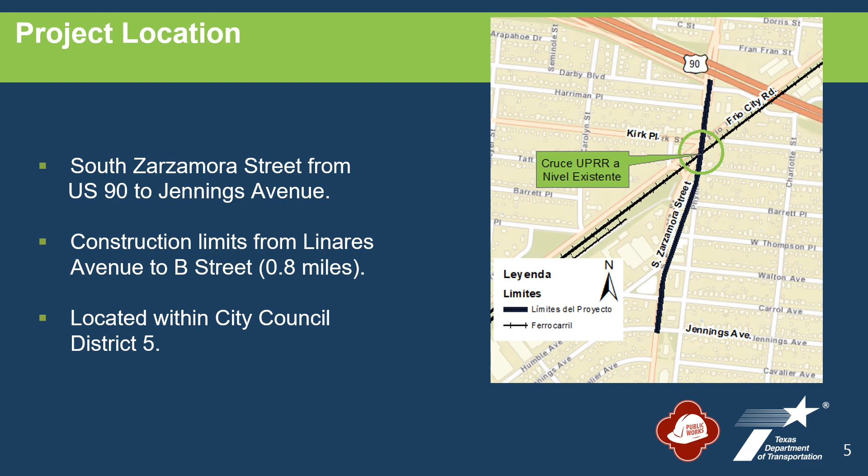The project is located within City Council District 5, and the city is working alongside Councilwoman Castillo on this vital project. This is a depiction of the existing typical section of South Zarzamora Street within the project limits. South Zarzamora Street consists of two 11-foot travel lanes in each direction with 6-foot sidewalks on both sides of the roadway. In addition, there is a 12-foot center-left turn lane with intermittent medians throughout the project limits.

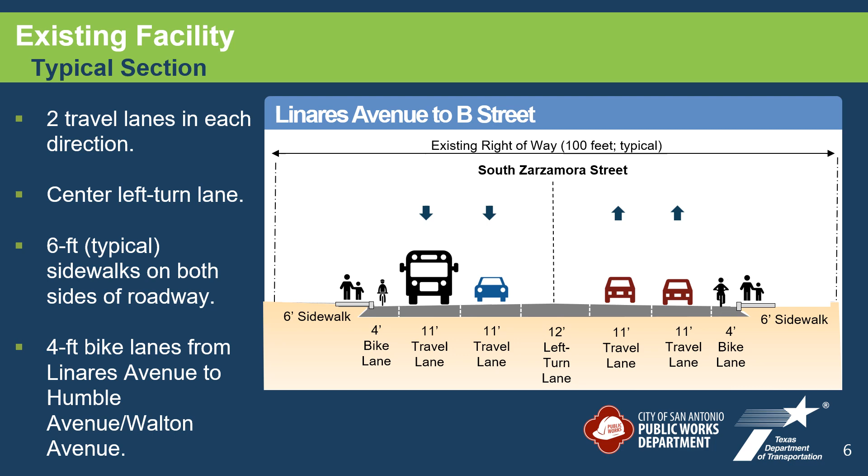From Linares Avenue to Humble Avenue, Walton Avenue, there are also 4-foot bike lanes on both sides of the roadway. The existing right-of-way width in this section is typically 100 feet. Here's a picture of the existing South Zarzamora Street intersection at Frio City Road. Zarzamora Street is a primary north to south arterial roadway that connects to US 90 on the north and Southwest Military Drive and I-35 on the south.

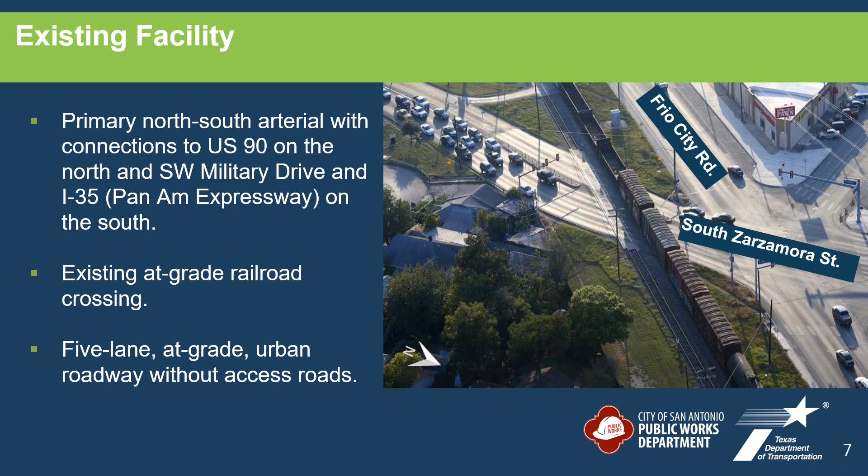Just south of Frio City Road are at-grade railroad tracks crossing South Zarzamora Street. In this section, Zarzamora Street is a 5-lane, at-grade urban roadway without access roads. The existing signalized intersection at South Zarzamora Street and Frio City Road forms a 5-legged intersection with Kirk Place. A railroad crosses Zarzamora Street just south of the intersection.

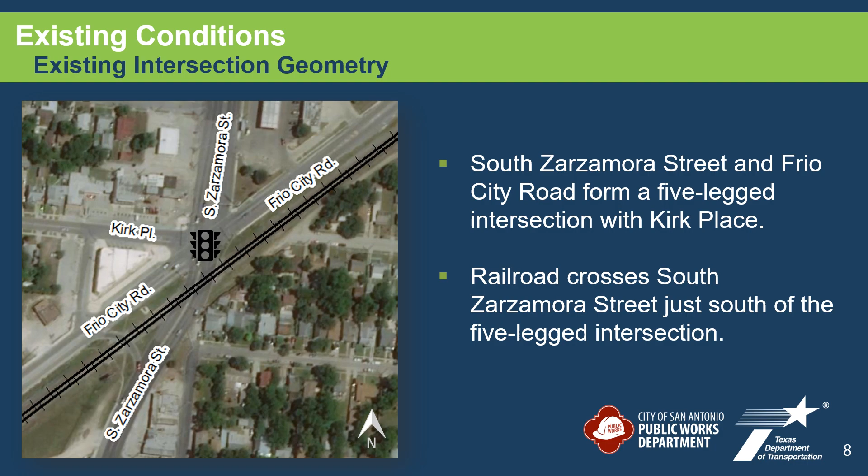South Zarzamora Street and Frio City Road intersect at an acute 35-degree angle, making the intersection complex for turning movements and signalized operation. According to the American Association of State Highway and Transportation Officials, multi-leg intersections should be avoided wherever practical. Multi-leg intersections are those with 5 or more intersection legs, such as the South Zarzamora Street, Frio City Road, Kirk Place intersection. These types of intersections are often inefficient and awkward for the traveling public.

Also, they create more conflict points than a standard 4-way intersection. Conflict points are locations in or on the approaches to an intersection where vehicles' paths merge, diverge, or cross. The complexity of an intersection increases with an increasing number of approach legs to the intersection. The number of potential conflicts for all users increases substantially at intersections with more than 4 legs.

Lastly, multi-leg intersections often create safety issues for pedestrians and bicyclists. These intersections increase crossing distances, pose navigation difficulties for pedestrians with visual impairments, and reduce the visibility of pedestrians and bicyclists to motorists.

According to the U.S. Department of Transportation, approximately 35 trains travel each day on the double set of tracks at the South Zarzamora Street Railroad crossing, averaging almost 1.5 trains per hour. One of Union Pacific's busiest rail yards is located approximately 1.6 miles south of the Zarzamora Street Railroad crossing.

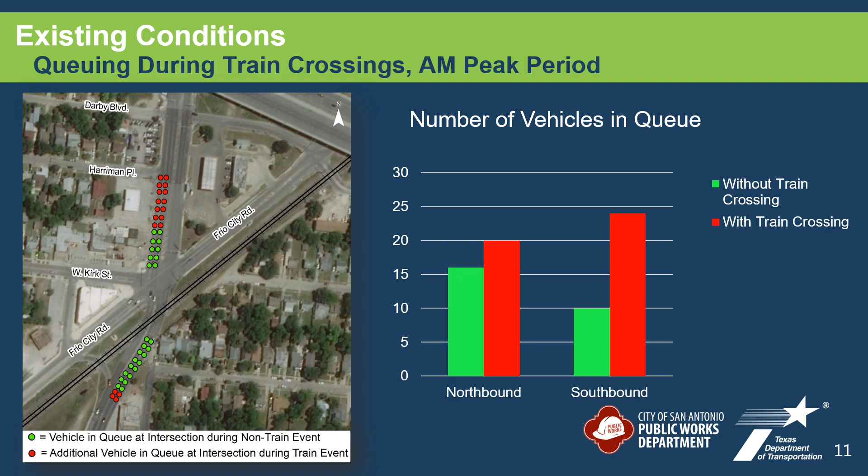Now, this may not seem so bad, but let's see what happens in the evening peak period. In the PM peak period, conditions worsen even further. Without a train crossing, there are approximately 24 vehicles that stack up in the northbound direction and 20 vehicles in the southbound direction. This number increases to about 80 northbound vehicles and 70 southbound vehicles during a train crossing. This equates to over a 100% increase in the number of vehicles that stack up at the intersection.

As you can see, the stacking length in the PM peak period is substantial, with the northbound approach backing up past West Thompson Place and the southbound approach backing up to Fran Street north of US 90.

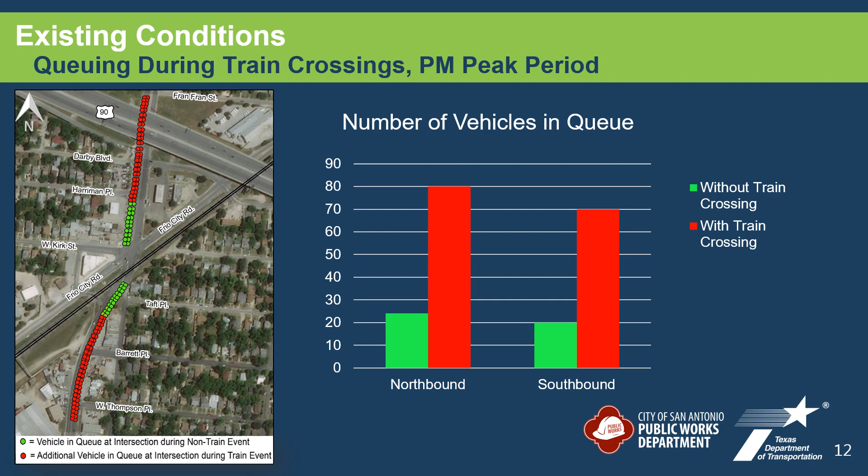The City of San Antonio also conducted a crash analysis to determine the existing safety conditions of the project area. This analysis revealed that the crash rate on South Zarzamora Street was approximately 3 to 5 times higher than the statewide average crash rate for a similar urban 4-lane roadway. This analysis was conducted using crash data for a 6-year period from 2013 to 2018.

The crash analysis also analyzed crash severity and the manner of the crashes in the corridor. During this time frame, one crash resulted in 2 fatalities, while approximately 27% of the crashes involved some form of injury. The majority of the crashes were rear-end collisions, while approximately 18% were angle crashes, which tend to be more severe. Since 2014, there have been 8 crashes along the project limits that involved pedestrians or bicyclists.

The proposed project is funded in part by federal funds administered through the Federal Highway Administration, a federal agency, and is therefore subject to the National Environmental Policy Act of 1969, also called NEPA. The proposed project was developed in accordance with the rules and regulations established by NEPA, Federal Highway Administration regulations implementing NEPA, and TxDOT's environmental and public involvement rules.

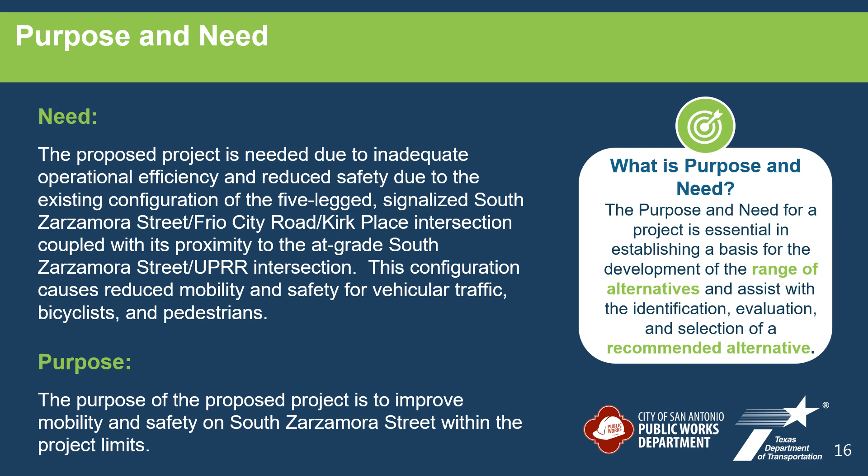A purpose and need for a project is essential in establishing a basis for the development of the range of alternatives and assist with the identification, evaluation, and selection of a recommended alternative. The proposed project is needed due to inadequate operational efficiency and reduced safety due to the existing configuration of the 5-legged signalized South Zarzamora Street, Frio City Road, Kirk Place intersection, coupled with its proximity to the at-grade South Zarzamora Street Union Pacific Railroad (UPRR) intersection. This configuration causes reduced mobility and safety for vehicular traffic, bicyclists, and pedestrians. The purpose of the proposed project is to improve mobility and safety on South Zarzamora Street within the project limits.

The South Zarzamora Street project has been a topic of discussion for many years, and there have been numerous public engagement activities held. The city has heard and considered feedback received, including comments on both sides of the issue. On the one hand, many community members have stated that this intersection is a concern, while on the other hand, some community members have expressed their desire to keep it the same. Current traffic and freight projections indicate that the problems currently experienced in the project area are only going to get worse in the future. The city now has funds available to provide a solution to the problem before it gets worse. The city and TxDOT are working together to provide a solution that improves mobility and safety on South Zarzamora Street.

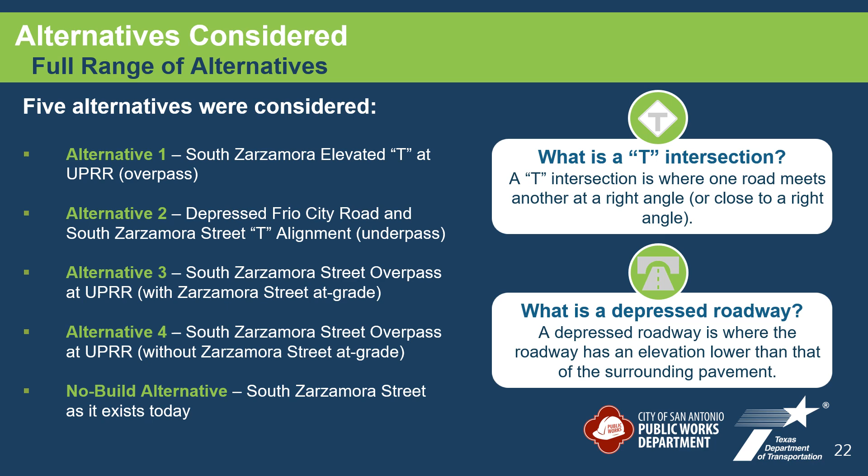Alternative 1 included the construction of an alternate route with 2 elevated through lanes from South Zarzamora Street to Frio City Road. This would include constructing 2 at-grade access roads on South Zarzamora Street for those wanting to continue north on the existing South Zarzamora Street. This alternative would have required the reconstruction of Frio City Road to raise Frio City Road to connect with the alternate route. Under this alternative, there would be no change to the existing at-grade railroad crossing on South Zarzamora Street.

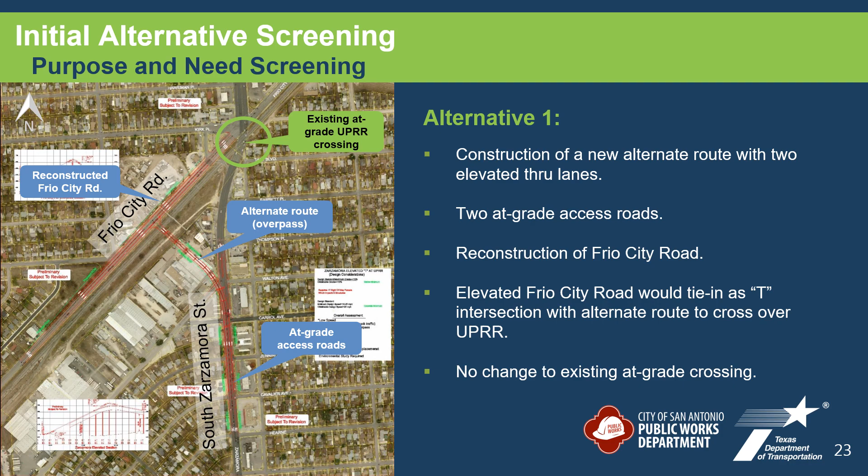Alternative 2 was very similar to Alternative 1, except the alternate route would be depressed as an underpass rather than being elevated. In addition, this alternative would have required the construction of a new railroad bridge structure. Similar to Alternative 1, Alternative 2 would require reconstruction of Frio City Road to connect to the alternate route, and it would not change the existing at-grade crossing on South Zarzamora Street.

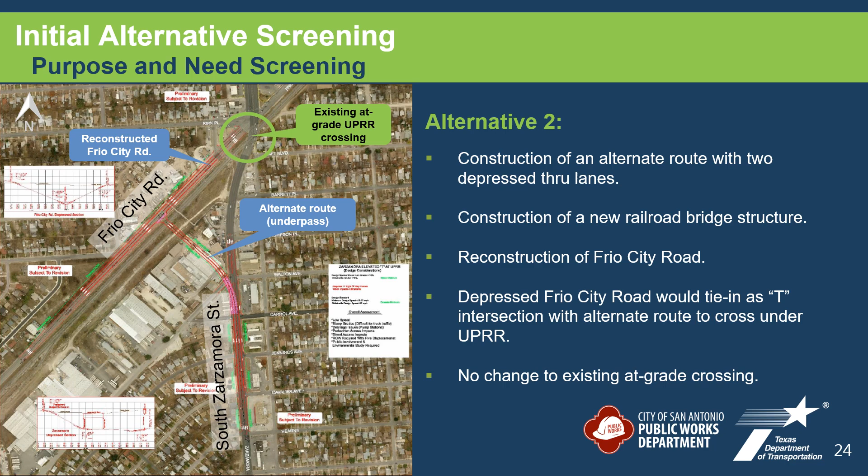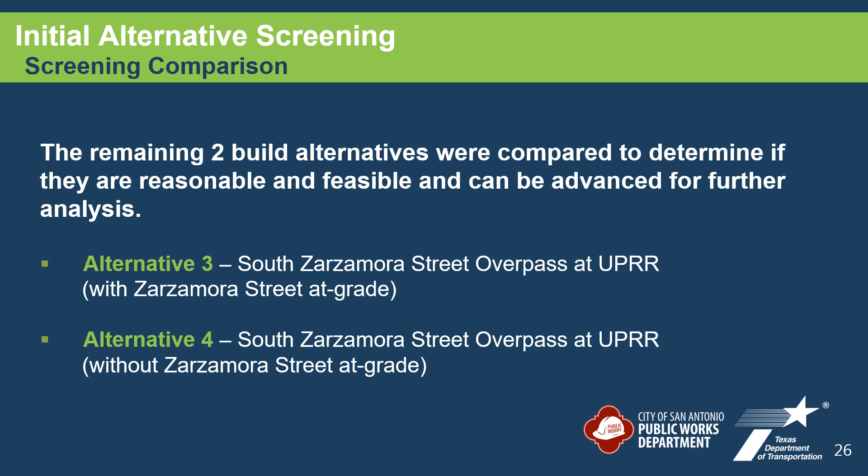Both Alternative 1 and Alternative 2 were eliminated from further analysis because they did not meet the project's purpose and need. More specifically, these 2 preliminary alternatives did not fulfill the purpose of improving safety as they did not reduce the at-grade conflicts with the railroad. The remaining 2 build alternatives, Alternatives 3 and 4, were compared in a screening matrix to determine if they were reasonable and feasible and could be advanced for further analysis.

Alternative 3 would include constructing 2 overpasses, one for northbound traffic and one for southbound traffic, each with 2 through lanes to cross the existing railroad crossing. In addition, 2 at-grade access roads, one in each direction, would be constructed to maintain access and connectivity to the local street network. To accommodate the proposed overpass and comply with current railroad roadway intersection requirements, this alternative would require the realignment of South Zarzamora Street south of the railroad crossing.

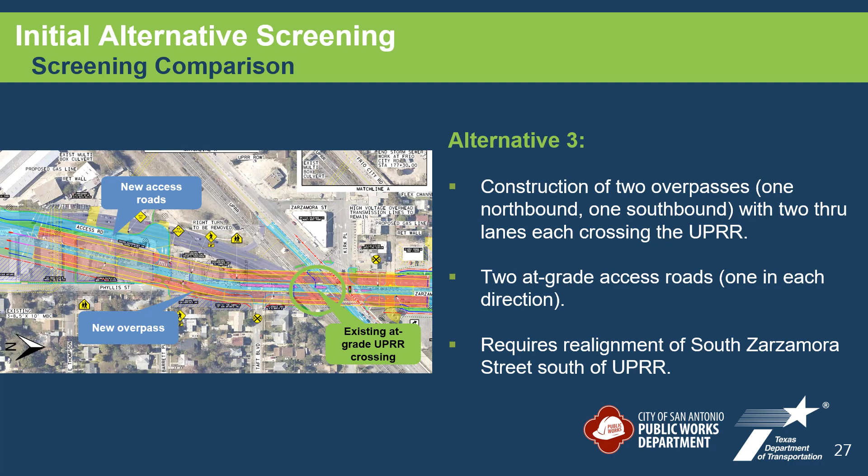Alternative 4 is similar to Alternative 3, but does not include constructing access roads on South Zarzamora Street. This alternative would also require the realignment of South Zarzamora Street south of the railroad crossing.

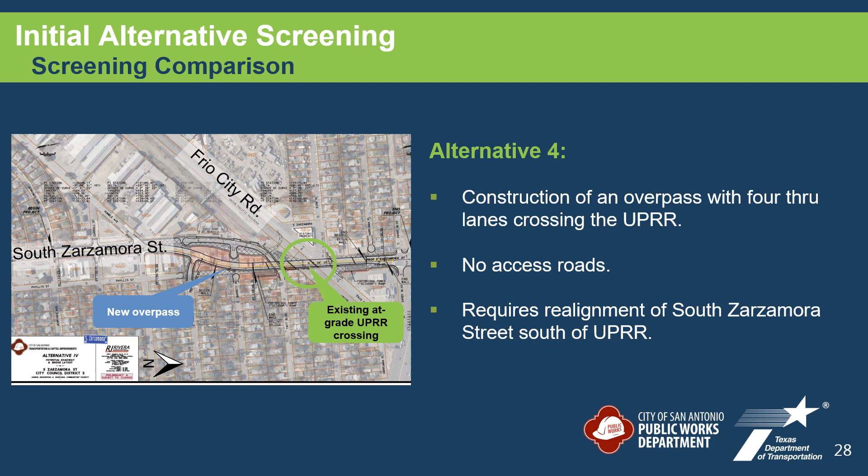Comparing these two alternatives, Alternative 4, the alternative without access roads, would result in decreased accessibility and connectivity to local surface streets since at-grade access roads would not be provided. This would substantially alter circulation within the adjacent neighborhoods, and properties along Barrett Place, Taft Boulevard, and Harriman Place would lose direct access to Zarzamora Street.

On the other hand, the proposed access roads in Alternative 3 would maintain accessibility and connectivity to the local street network and adjacent neighborhood. Alternative 3 would also retain local access via Phyllis Street, thus maintaining the normal, though modified, accessibility to neighborhood streets. Under Alternative 4, however, local access via Phyllis Street would be lost as a connector for local streets. This loss would require additional signage for accessing the neighborhood streets.

For bicyclists and pedestrians, Alternative 3 would include accommodations for these modes on both the proposed overpass and at grade. However, under Alternative 4, there would be no bicyclist or pedestrian accommodations such as sidewalks provided at grade, and all bicyclists and pedestrians would utilize the overpass only.

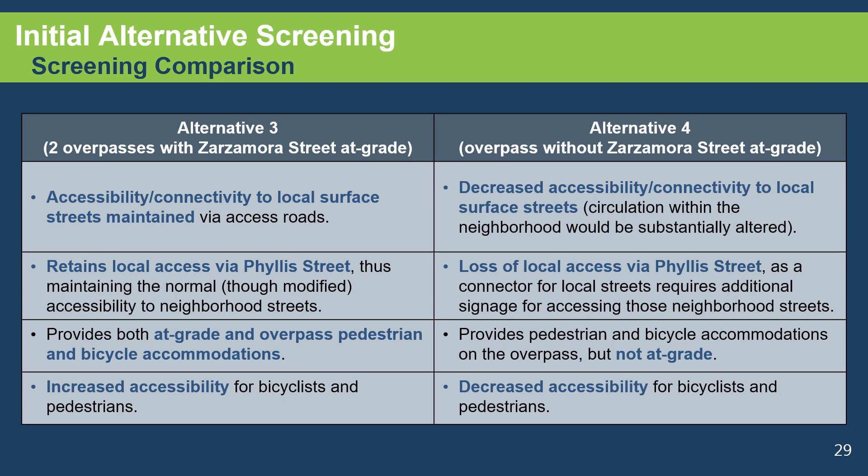Under Alternative 4, neighborhood access to Frio City Road would be reduced to an existing substandard crossing at Darby Boulevard, Harriman Place, whereas motorists could continue to use the existing at-grade rail crossing on South Zarzamora Street under Alternative 3. Alternative 4 would require the reconstruction of Darby to a collector roadway to handle the increase in traffic, whereas Alternative 3 would not.

Under preliminary review, it appears Alternative 3 would result in a greater direct impact to properties, impacting a total of 22 parcels with 2 residential and 6 commercial displacements. Alternative 4, on the other hand, was anticipated to impact 11 total parcels with 1 residential and 6 commercial displacements.

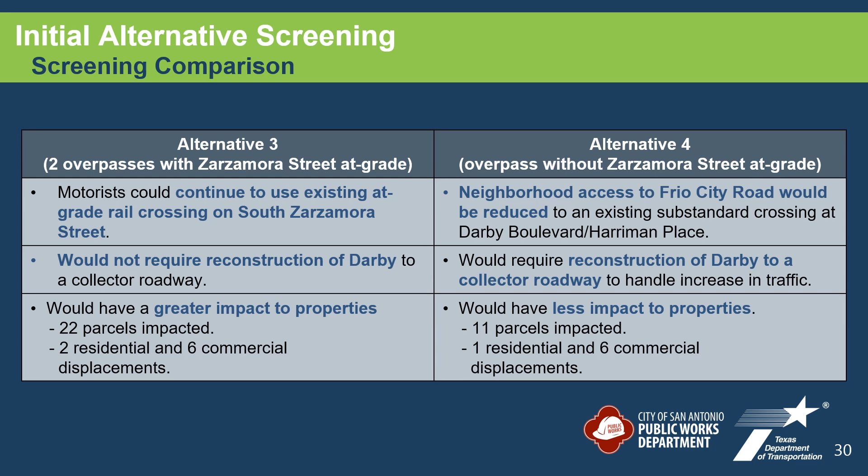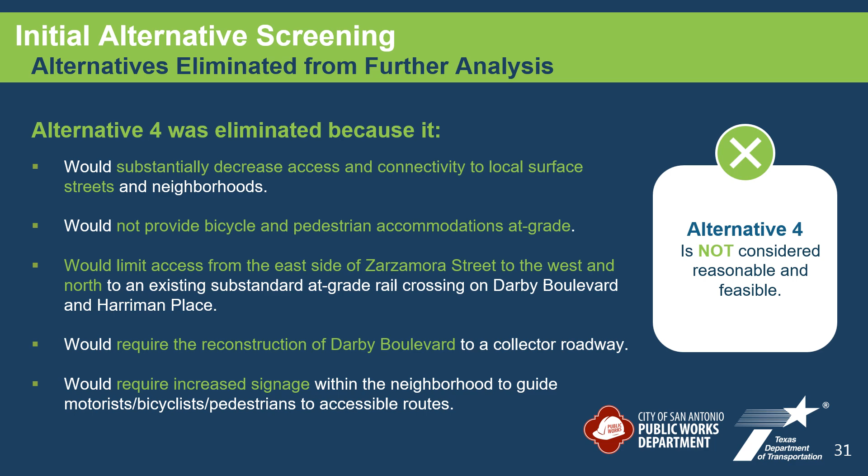Comparing the two alternatives, Alternative 4 was determined to not be reasonable and feasible and was eliminated from further review. This alternative was eliminated because it would substantially decrease access and connectivity to local surface streets and neighborhoods, would not provide bicycle and pedestrian accommodations at grade, would limit access from the east side of Zarzamora Street to the west and north to an existing substandard at-grade rail crossing on Darby Boulevard, Harriman Place, would require the reconstruction of Darby Boulevard to a collector roadway, and would require increased signage within the neighborhood to guide motorists, bicyclists, and pedestrians to accessible routes. Therefore, this alternative was also eliminated from further analysis.

The recommended alternative, Alternative 3, would improve mobility and travel delays for through traffic during a train crossing. It offers both at-grade and overpass crossing options at the railroad. It would also allow local access to neighborhoods and businesses via the access roads. Lastly, the project would provide safer access for pedestrians and bicyclists. The proposed bridge structure would be located from just north of Humble Avenue, Walton Avenue to Harriman Place.

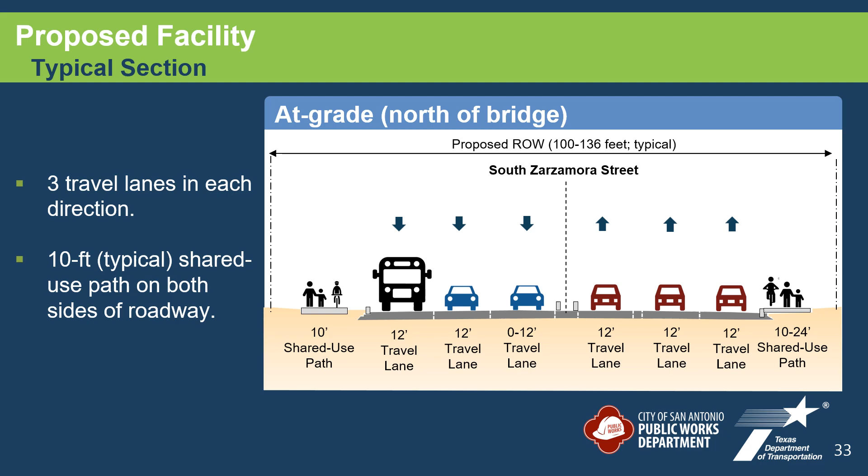This is a depiction of the proposed South Zarzamora Street north of the bridge. Approaching the bridge, Zarzamora Street would consist of 3 12-foot travel lanes in each direction with a 10-foot shared use path on both sides of the roadway. South of the bridge, Zarzamora Street would typically consist of 2 10 to 11-foot travel lanes in each direction with a 5-foot bike lane and 6-foot sidewalk on the west side of the roadway and a 10-foot shared use path on the east side of the roadway.

From Humble Avenue, Walton Avenue to Harriman Place, 2 overpasses would be constructed, one for northbound traffic and one for southbound traffic. Each overpass would consist of 2 12-foot travel lanes and a 10-foot shared use path. At street level, Zarzamora Street would consist of 1 12-foot travel lane in each direction, a 10.5-foot median, and 10-foot shared use paths on both sides of the roadway.

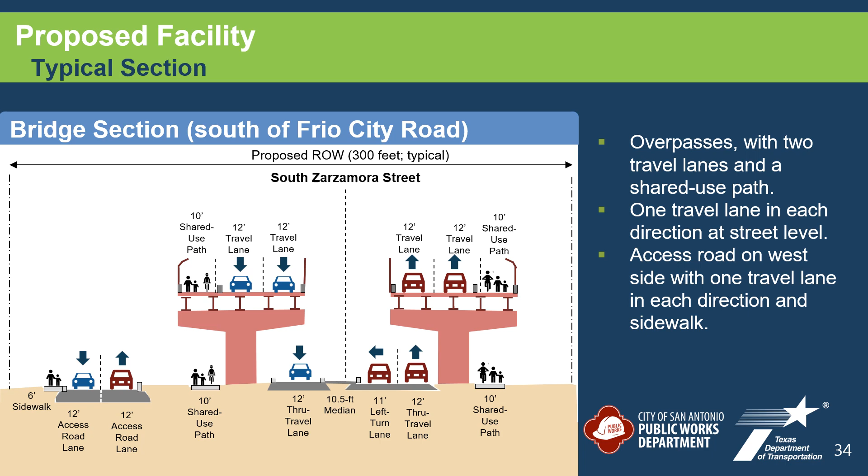In addition, an access road would be constructed on the west side of South Zarzamora Street and would consist of 1 12-foot travel lane in each direction with a 6-foot sidewalk. Per coordination with Union Pacific, the proposed South Zarzamora Street needs to cross the railroad at as close to a perpendicular angle as possible.

The city needs to realign South Zarzamora Street south of the railroad to achieve this requirement. This would result in the permanent closure of Walton Avenue, East Thompson Place, and Barrett Place from the existing South Zarzamora Street to Phyllis Street. East of Phyllis Street, these local roadways would remain unchanged. In addition, Darby Boulevard would become a cul-de-sac west of South Zarzamora Street.

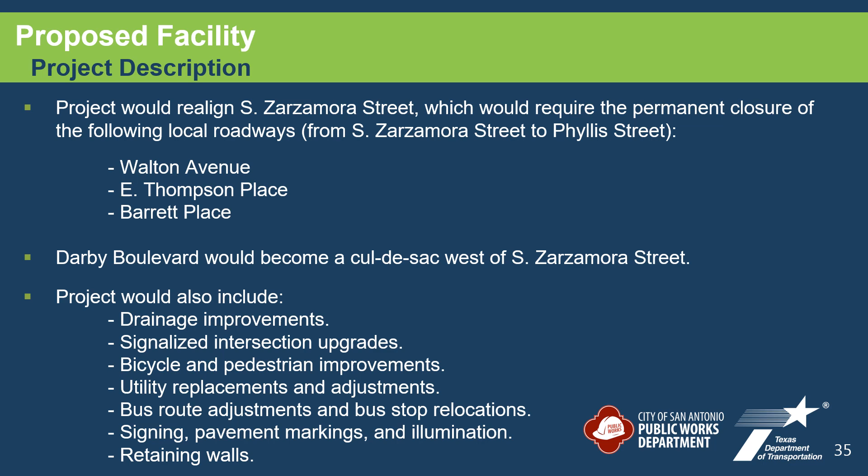The proposed project would also include several other elements, including drainage improvements, signalized intersection upgrades, bicycle and pedestrian improvements, utility replacements and adjustments, bus route adjustments and bus stop relocations, signing, pavement markings, and illumination, and the construction of retaining walls. A copy of the draft schematic of the proposed alternative is available for public review and input at www.southzarzamora.com.

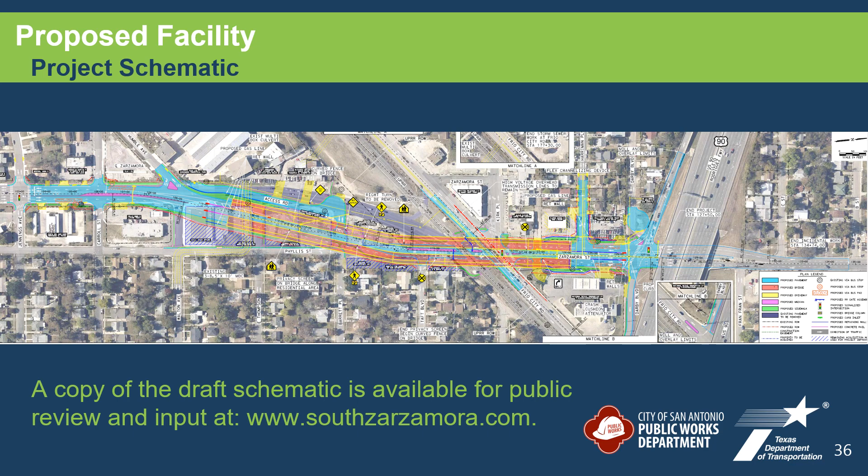Implementation of the proposed project would require the acquisition of right-of-way, including the partial acquisition of 9 parcels, complete acquisition of 9 parcels, and temporary construction easements at 9 parcels. Residential and commercial displacements are anticipated. Acquisition and relocation assistance would be provided for affected property owners and would be in accordance with the Uniform Relocation Assistance and Real Property Acquisition Policies Act of 1970.

If you have questions on the right-of-way acquisition process, please let us know by submitting a comment or contacting us at any time. We will provide you with commenting options and contact information at the end of this presentation. Also, right-of-way booklets that describe the process are available for download and review at www.southzarzamora.com.

Per the NEPA process, the environmental assessment must also evaluate a no-build alternative, which is the alternative representing the case in which the proposed project would not be constructed. Under this alternative, South Zarzamora Street would remain in its existing condition as a 5-lane at-grade urban roadway with an at-grade railroad crossing and without access roads. This alternative would not meet the project's purpose and need of improving mobility and safety along South Zarzamora Street. However, the no-build alternative will be evaluated throughout the EA for comparison purposes.

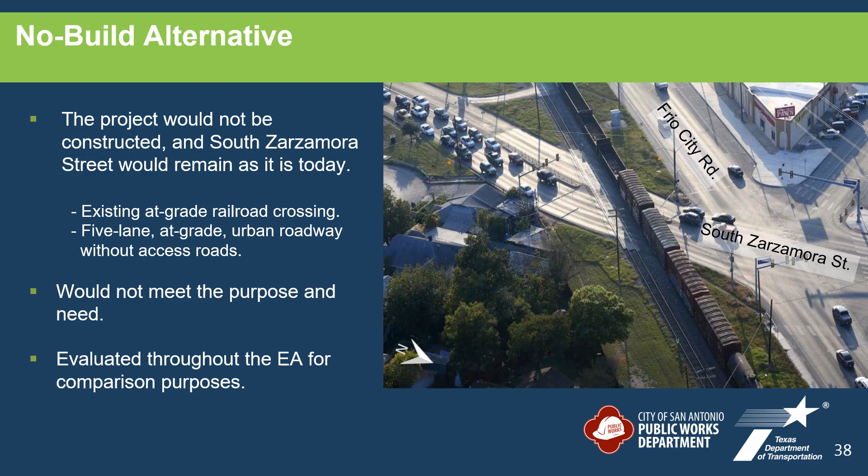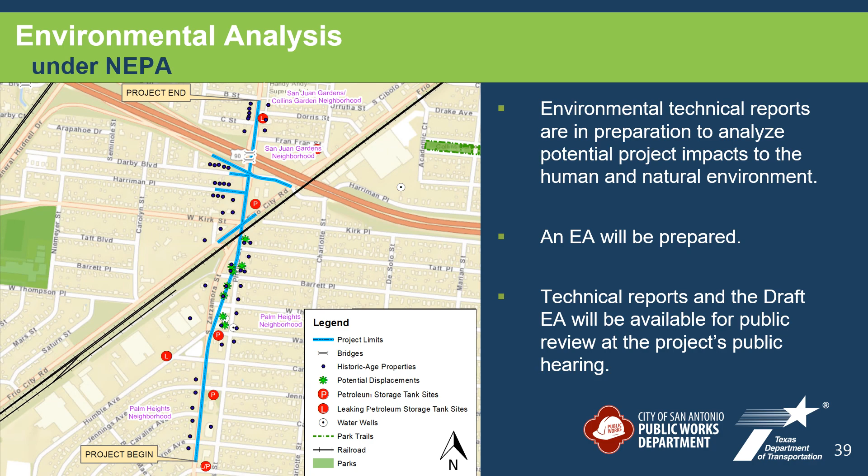As mentioned previously, due to federal funds being used, the project will follow the NEPA process. Several environmental technical reports are currently underway to analyze potential project impacts on the human and natural environment. After the technical reports are completed, an EA will be prepared to summarize the findings of the technical reports. The technical reports and the draft EA will be available for public review at the project's public hearing.

Prior to this public meeting, the city held meetings with potentially affected property owners. Moving forward, the city will consider feedback received from this public meeting to refine the proposed alternative. After the environmental technical reports and draft EA are completed, a public hearing will be held. The city anticipates receiving environmental clearance and completing the design for the project in late 2023. Following environmental approval, the city's real estate department will initiate the right-of-way acquisition process. Construction of the project is anticipated to begin in early 2025.

All public meeting materials can be found at www.southzarzamora.com. These materials include this recording, the script for this presentation in English and Spanish, the proposed draft schematic, comment forms, and booklets containing further information on the right-of-way acquisition process. The city is committed to continuing their efforts to gain public feedback on the proposed project. We understand this virtual public meeting format is a bit different, so let's take a few minutes to explain the comment process, which is the most important part of this presentation.